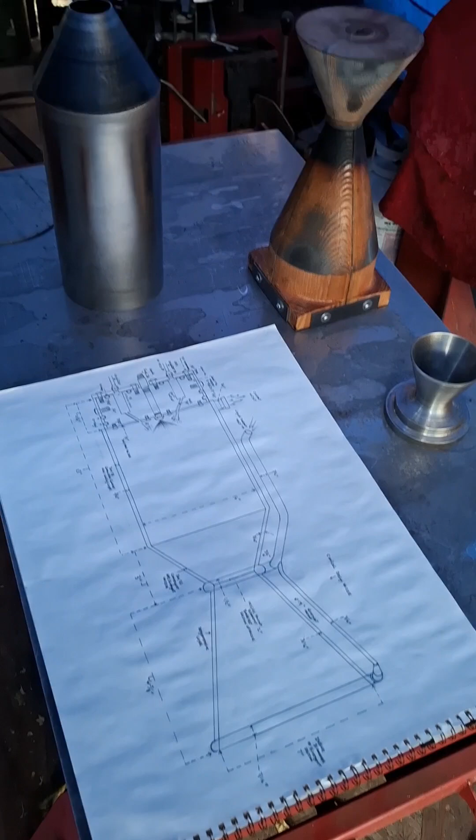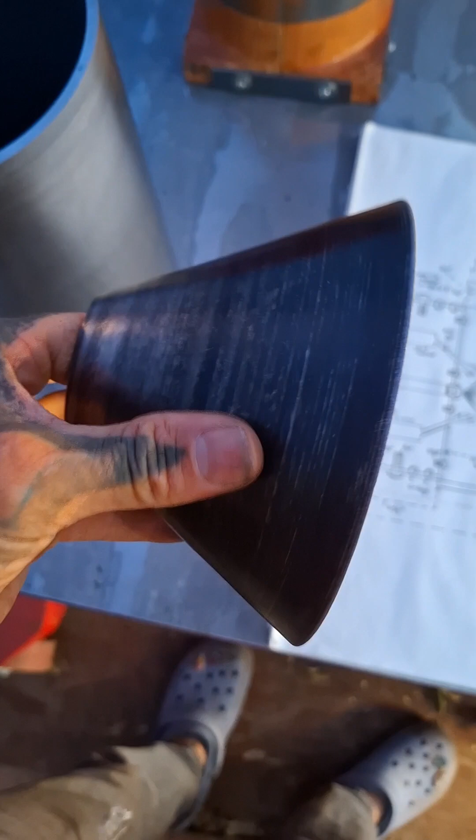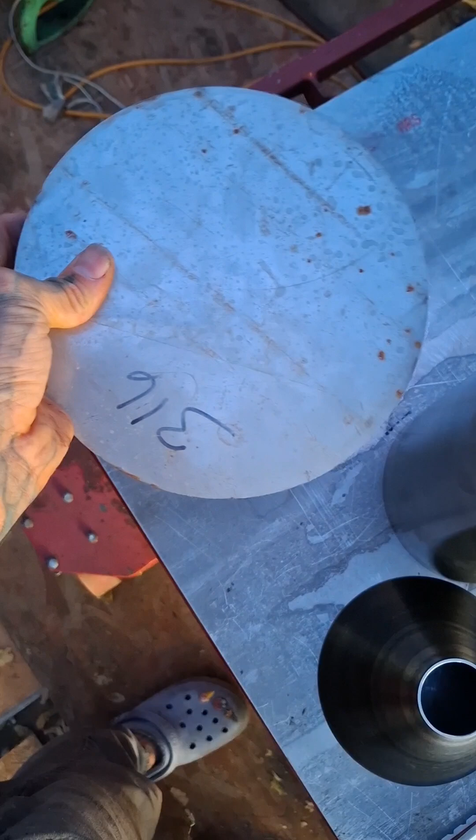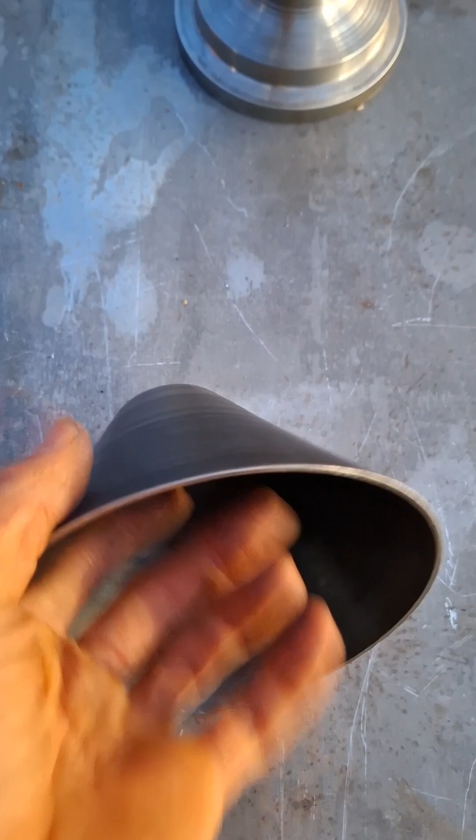I'm basically going over what I got right here, and slowly but surely got this finished. This has been metal spun, as you can see, and it came out really good. This is 316 stainless steel, 1/8 inch thick, and it was spun out of a disc like this - a sheet metal stainless steel disc, 1/8 inch thick, 316, not 3/16. So yeah, came out really good. You can just see just how nicely, perfectly round this thing is. Still pretty thick, still pretty heavy, and look at how straight that is. Super smooth all the way down. Really nice.

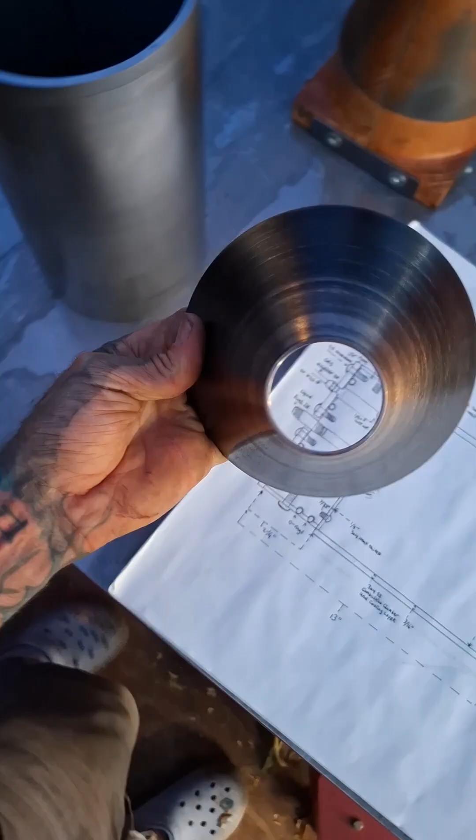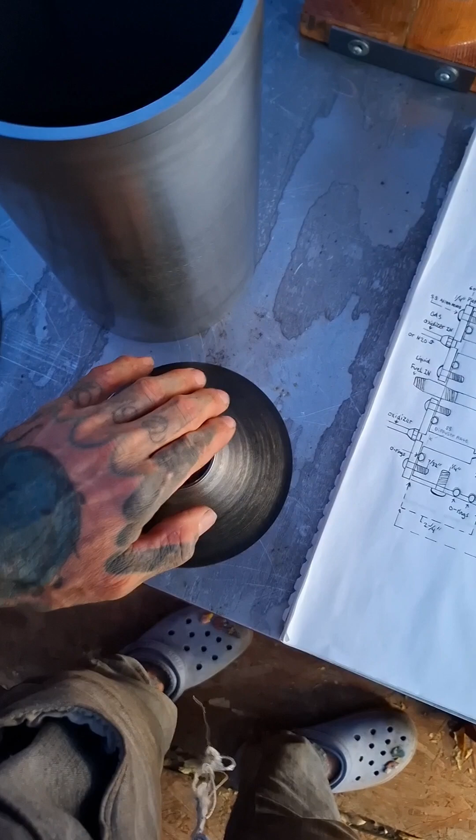This is why I highly recommend metal spinning over using a slip roller. Because with a slip roller, you can slip roll it and start to bend it into the shape of a cone, into a taper, and then when you weld it, it starts to protrude like an imperfection bend at the weld. Almost like you'd have to have it in a mandrel and secured in that mandrel nice and tight when you're welding it, and even so, it's not as perfect.

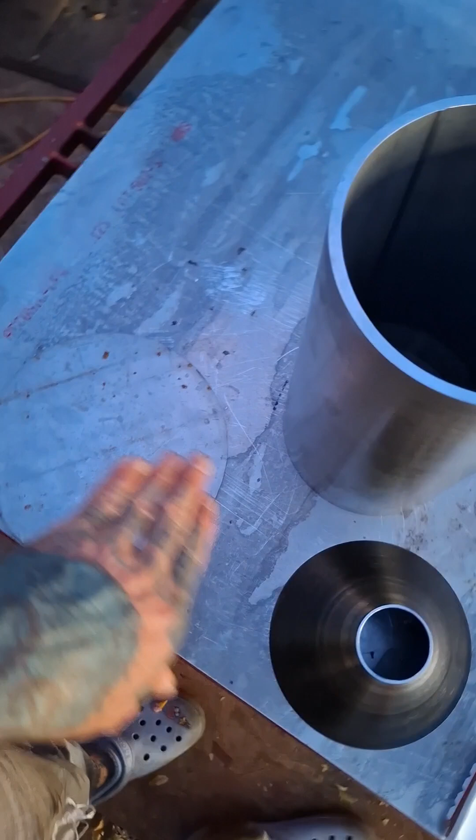So as you can see, this is really nice. At the shop, they just stick this onto the metal spinning machine. They drill a nice perfectly centered hole, and it's pressed up against the roller, and they use a rosebud to heat it up really hot, the piece they're actually going to work with. So this part right here of the sheet metal, they're going to probably heat it right here in the middle, because that's where they start. And they work their way up slowly but surely, heating this part right here, then working their way up to the edge until they get this profile.

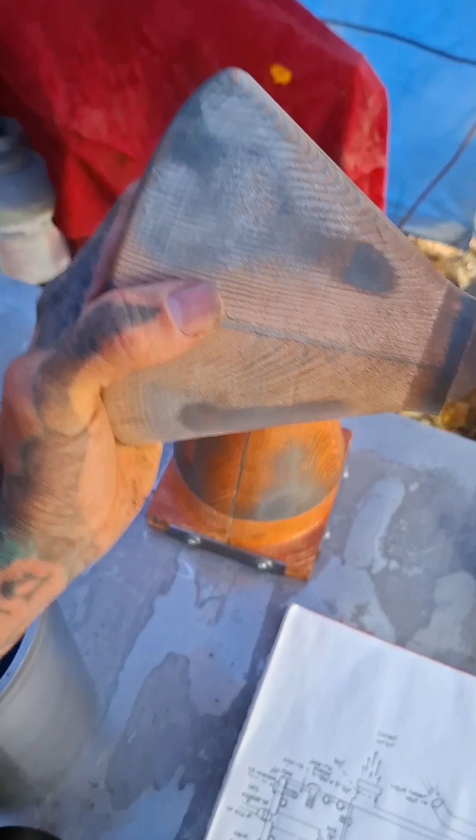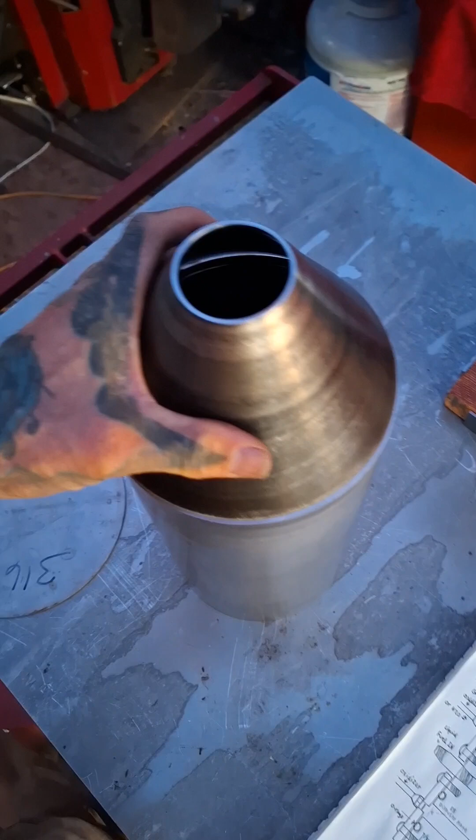And the profile is determined by the mandrel. So your mandrel should look like something like this, like what I casted, and it would be out of steel. This would be a steel version, and it would have to be the exact angle of 19 degrees, between 15 and 20 degrees angle. So you've got to make sure they have something there provided for you that's relatively in that shape, and it goes down to 2 inches, this hole right here. So as long as they have that, you're good. If not, you'd have to machine it yourself and then take it to your nearby metal spinning shop and make sure it's to the correct measurements for their machine.

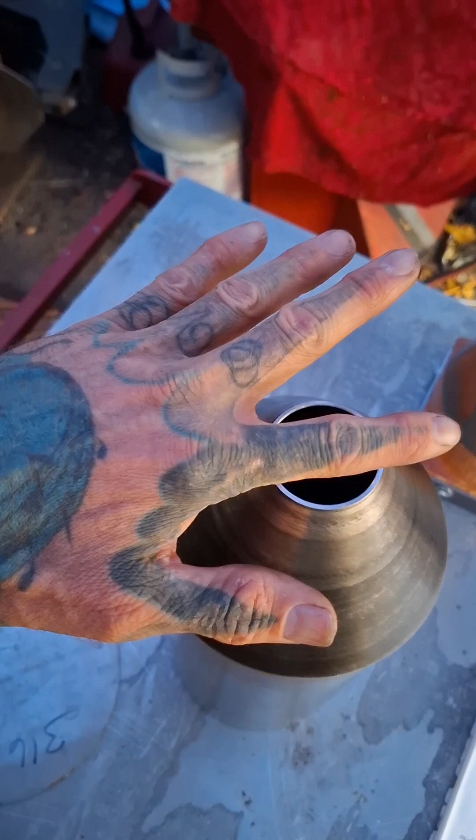So it's got to have a hole, or have a protruding shaft coming out of the mandrel, so that the sheet metal can slip right into the mandrel on the face portion right here and be perfectly centered. And because it's applying so much pressure, you don't want this to slip out for any reason, because it's so thick, and because of the 316 material, it needs to be secured in there really good.

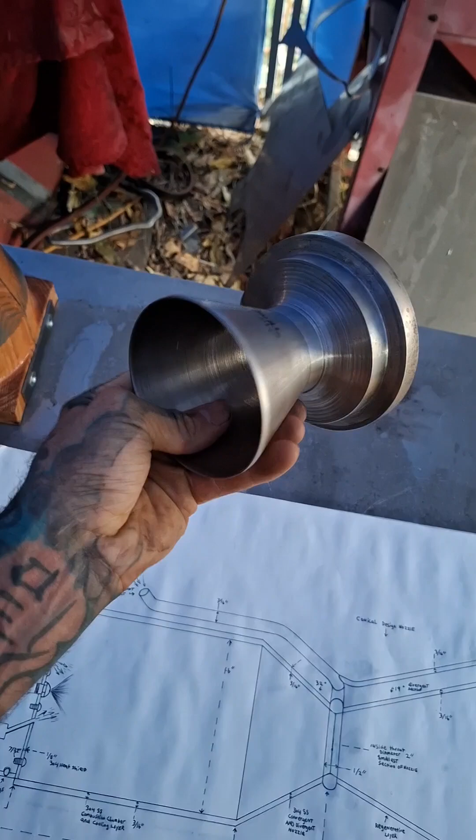Having the machines at the shop is so much better, because the machine I have is a lathe, and it's not as heavy duty. I can only do between 16ths of an inch thick or so, in that range - I can't do anything 1/8 inch. But it's a lot easier than machining a chunk of stainless steel like this, a small version. This took me about a week because I had a small lathe, but for them to metal spin it, it takes between 5 to 10 minutes max. So just setting up is what takes the most time right there.

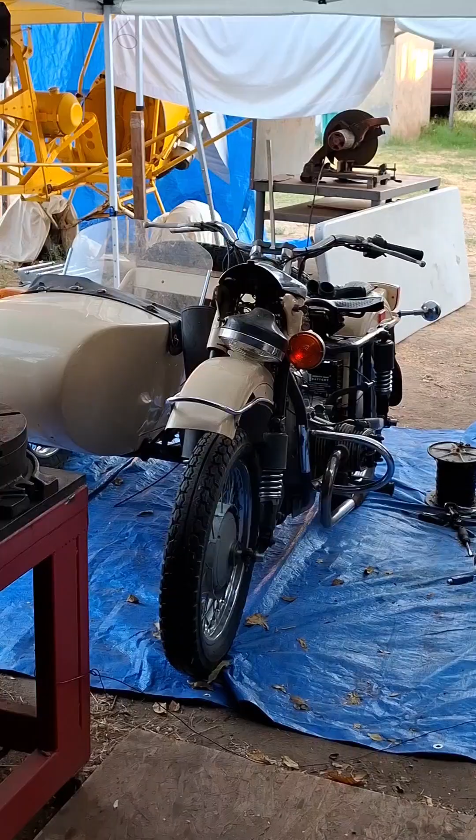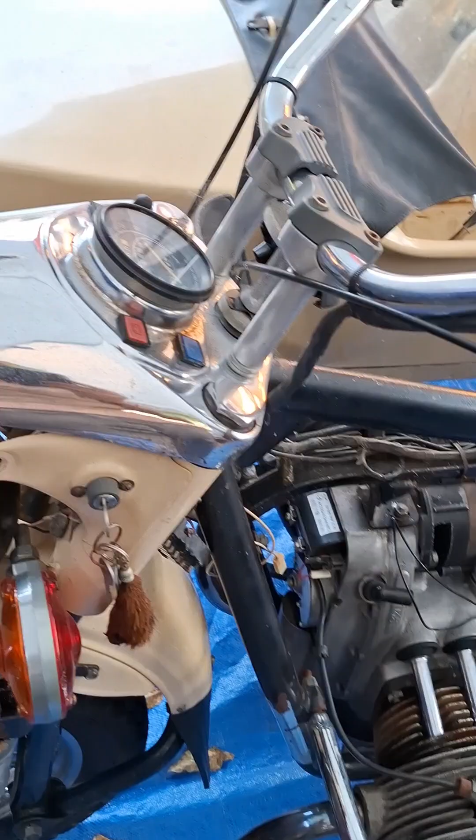So yep, I've been busy trying to do this, and I've also been busy trying to get my new sidecar motorcycle fixed up, because I just got this, and as you can see, I'm doing some work on the engine. So that's the other project I'm doing right here. I gotta get new gaskets, cylinder gaskets, and I'm trying to troubleshoot the wiring because it's not correct. I got new mirrors coming in, a new seat is going to be fabricated inside the sidecar, and I got new intake manifolds for the air filter that connect to the air filter to the carburetor.

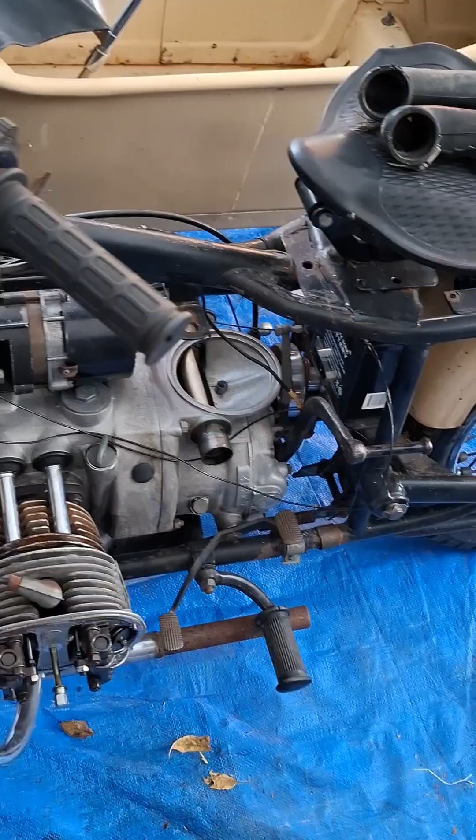I got a new air filter assembly, still in the box. I got a bunch of parts coming in, so I'm going to be putting this thing together. I'm also working on my airplane too, so I need to fix that up. It's almost done, I just need to get the cables installed and a new fuel line, and then I should be able to test fly my airplane soon.

I need new fluids, new oil, new transmission oil, new oil for the engine. Everything is slowly getting there, little by little. I got a lot of projects going on, and I also got my gazebo over there, and a greenhouse going on, so I'm gonna be growing some vegetables soon.

So, yep, this is pretty much it. You guys already seen this.

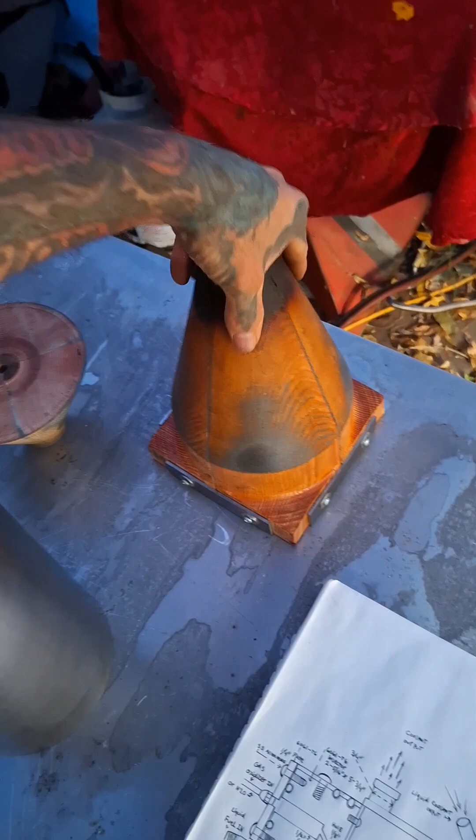So now I need to do the divergent section, which will be this guy right here. This is the wood version, so I can't do steel or stainless steel with it. I could probably do aluminum, but this thing is useless to me. I just machined this block of wood for no reason. Well, you learn as you go, you start learning these things.

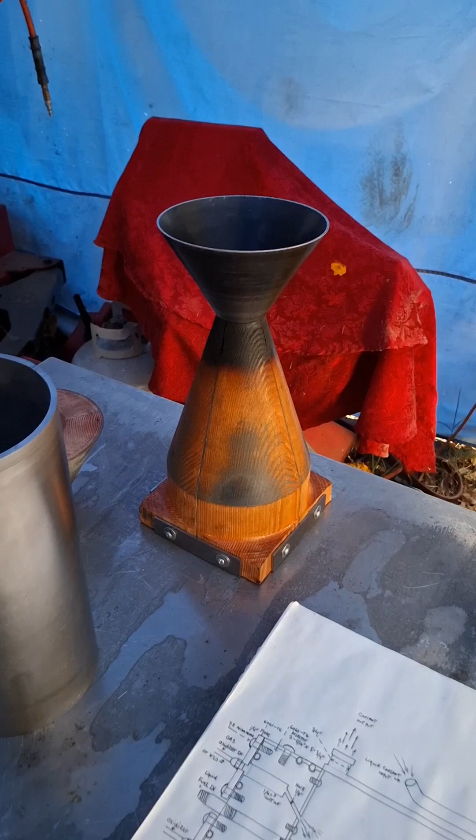Basically that goes there, just like that when it's done. This will be the stainless steel version, but it won't be this long. It has to go all the way down to 7 inches in diameter, and that's also determined by the angle of your nozzle. If it's between 20 or 15 degrees, that can fluctuate the flow, the pressure of the flow, the exit velocity, and exit pressure. You want to equalize to the ambient pressure.

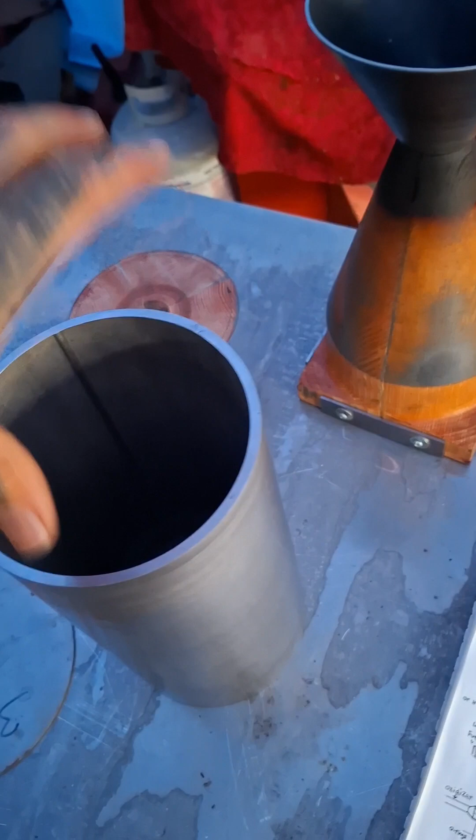Everything works together properly, and they have to be according to the size of the engine, the components, the combustion chamber, the length of the combustion chamber, the nozzle diameter, the fuel you're using, the oxidizer you're using, and the divergent length, the divergent angle, even the convergent, even though that won't make such a big difference in change. It's just about the flow entering into the throat as easily as possible without creating too much heat. If it's constricted down too narrow, that could cause too much heat buildup alongside the walls and towards the narrow section of the throat.

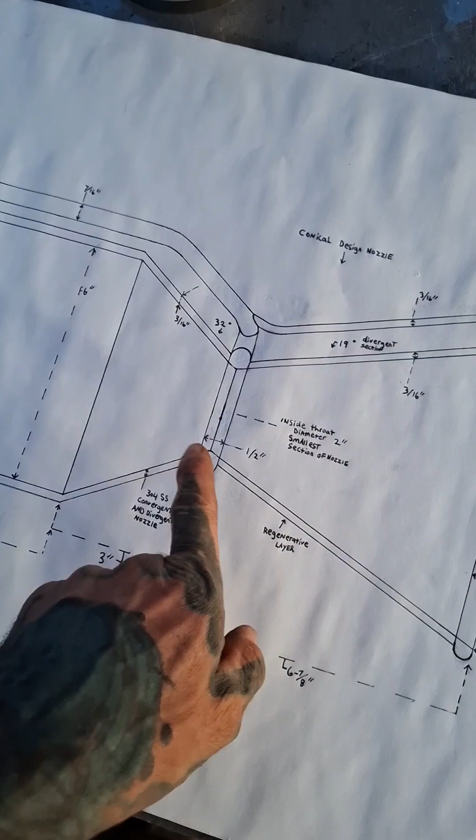So you got to make sure that right here on the throat section it's somewhat rounded off, so the transition is a lot easier for that hot exhaust to enter into the throat, and then it converts into kinetic energy. After that it's all depending on the size and dimensions of your nozzle according to your engine size. So yeah, that's pretty much the gist of it.

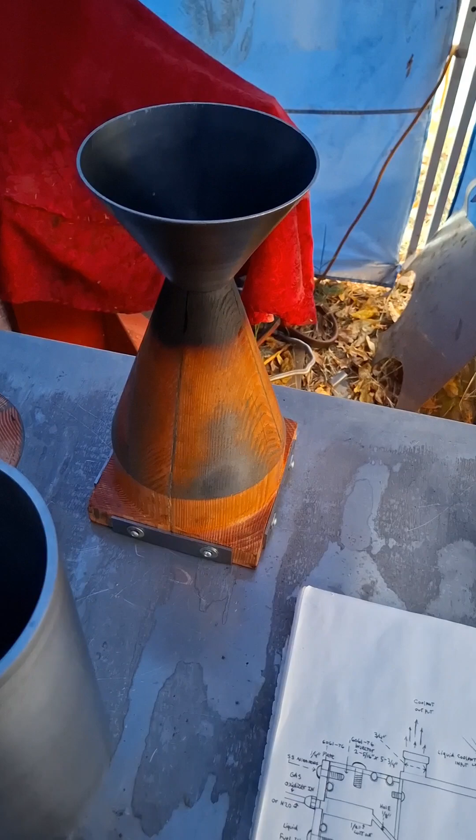A lot of careful calculation has gone into this, and so this should theoretically work. I'm hoping it will work. So I do have these plans here for people to have if they want.

I'm sure you guys would rather wait until I actually do the testing of this engine, to see if it actually works properly and sufficiently, and start getting some numbers logged into a data sheet that I'm going to have, punching in certain numbers and heat readings.

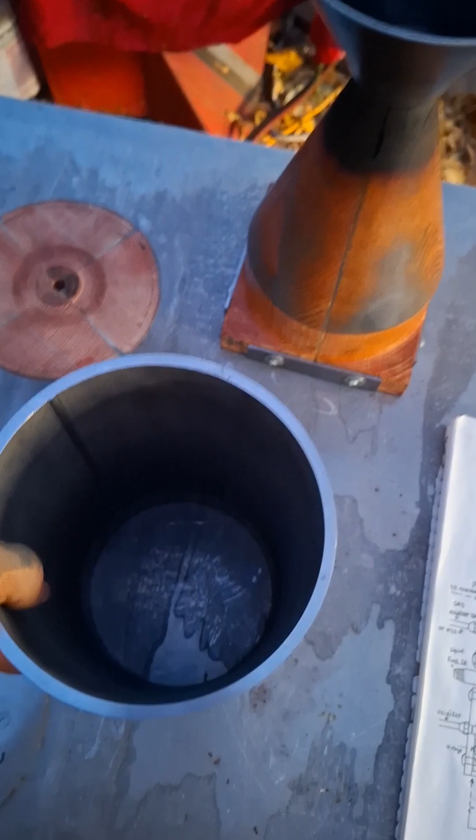I'm going to run thermo stickers, basically these little sticky pads that go onto certain portions of the engine, and they automatically record the temperature and keep it logged into the actual sticker. But they only go so high. Obviously you wouldn't want one on the portion of the engine where it's over 2,000 degrees, but that's why you'd have a special thermocouple lead probe inserted right there, so you can record that.

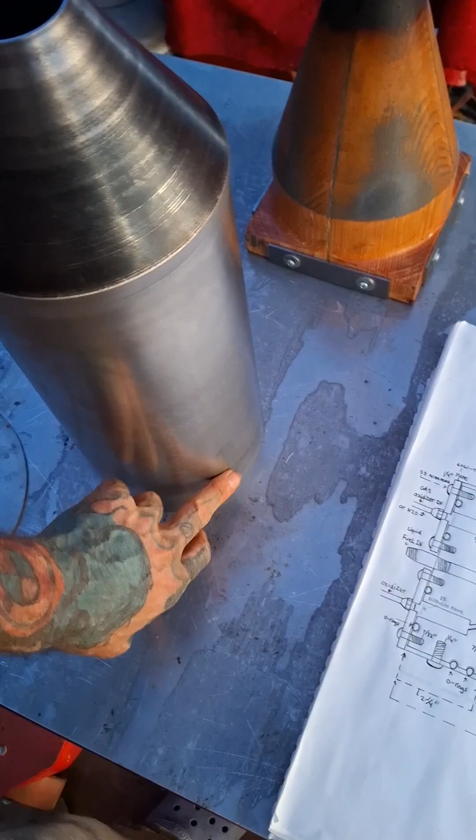So I would have it somewhere right here on the hottest section, on the actual bell of the divergent section, as well as the combustion chamber and towards where the bulkhead, aka the injector plate, would be. I want to make sure that the temperature is adequate and not too high. So that's pretty much it. I'll keep you guys updated, and that's all folks.